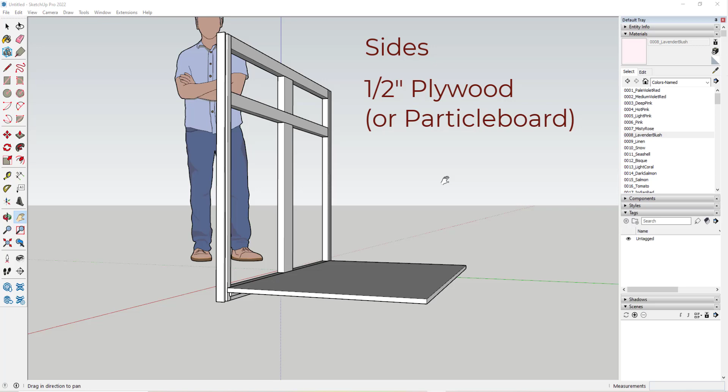We already know the sides are going to be cut from half inch thick plywood. That's a good standard thickness for plywood or particle board. It keeps the structure sturdy and doesn't make the cabinet too heavy. We also need to determine how tall the sides will be, as well as the depth of the sides.

Let's go back to AutoCAD to help us figure this out. Here we have the first front elevation, and now we're doing a cross section of the cabinet, with the face, the bottom, the back, and the supports, which in the last video I told you was a 1-inch by 4-inch. Turns out it's a 1-inch by 5-inch, so please make sure you update your information. It should be a 1 by 5-inch support right here.

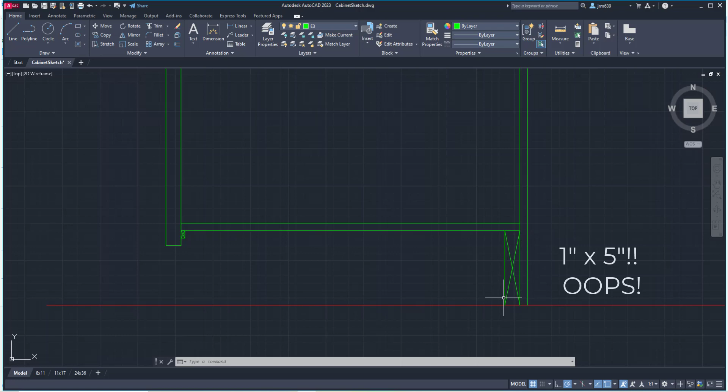What we need to understand about the side of a cabinet is that the toe kick is going to be installed. In our shop, we install the side first and then the toe kick. But in order to plan it out, you have to put the toe kick in first and then determine what the side is. I know it's crazy and confusing, but work with me here, people.

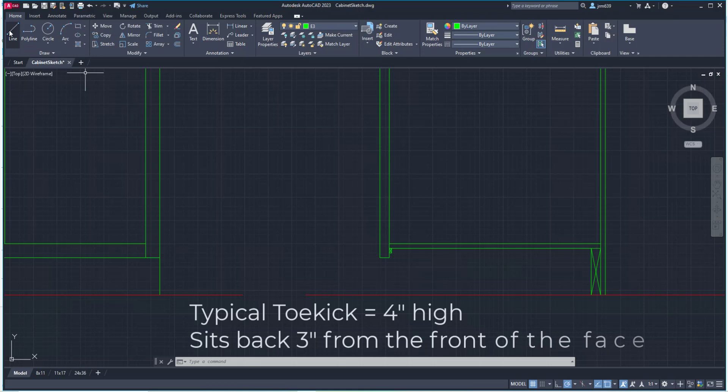A toe kick is typically 4 inches high, and it usually sits back from the front of the face 3 inches. So let's use a line and temporarily map this out. I'm going to draw a line straight down, notice that's 4 inches. Let's use the offset command, 3 inches, grab that line, and move it to the back. That's where the front of the toe kick is.

Lots of people use different sizes, and some would actually put in a 5-inch toe kick instead of a 4-inch, but at our shop we did not do that. We just used a simple 1 by 4, usually pine.

I'm going to do the thickness of this at 1 inch. And because this toe kick is going back in space, we're going to put an X just to indicate that's exactly what's happening.

Now, the reason I'm not putting an X in here - I was thinking about it - we usually want to use a hatch in plywood to indicate that it is indeed plywood. It's different from the supports that you see here.

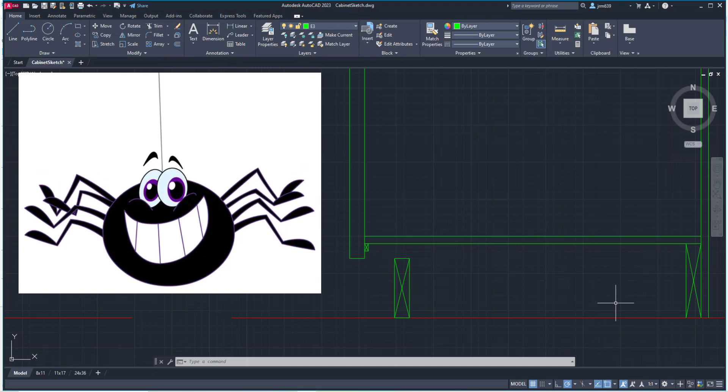Okay, so yes, it does create a little bit of a gap right here, and basically it's very empty underneath the cabinet. And sometimes you need to make a nice cute little house for spiders. I mean, I'm kind of anti-spider in terms of them getting into the cabinets and into our spaces, but they are free to live in walls and free to live under the cabinets. Just don't come into my cabinet. But they're very important parts of the natural ecosystem. They eat lots of bugs, so let's be spider friendly and create cute little spaces for them.

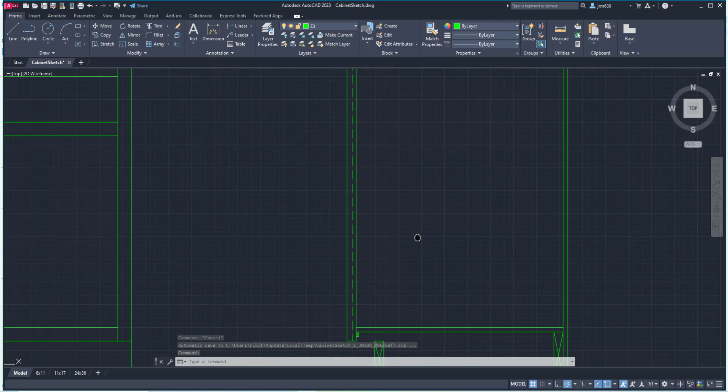But now that we know where the toe kick is supposed to go, remember that our dado went back 3/8 inch. So I'll hover and put 3/8 inch, and this is where the dado is actually cut. Let's make this a dashed line so we can tell this is inside - not on the outside of the cut, but in the wood itself. That helps remind us there's a dado mark there.

All right, so with the red line, la la la, that's not what I meant to do. Let's select it, not choose a color.

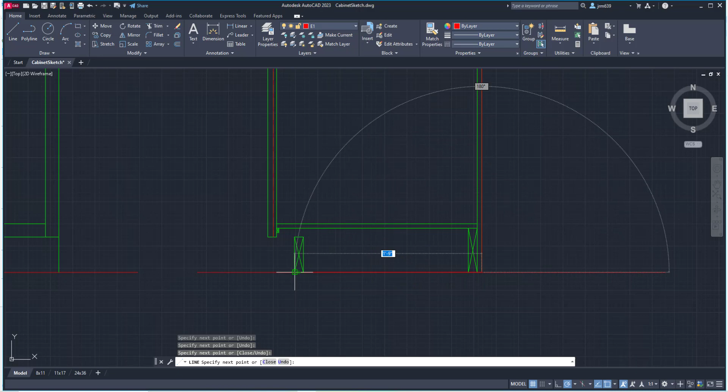So the side is going to live from here all the way up our dado, and it's going to be flush with the top of the cabinet. There's a couple trains of thought on whether or not it actually goes to the back or through the back. At our shop, we actually had our sides go all the way to the back side of the cabinet. So I'm just illustrating where the side is going to be living. It comes all the way down, and it does cover all the way to the finished floor.

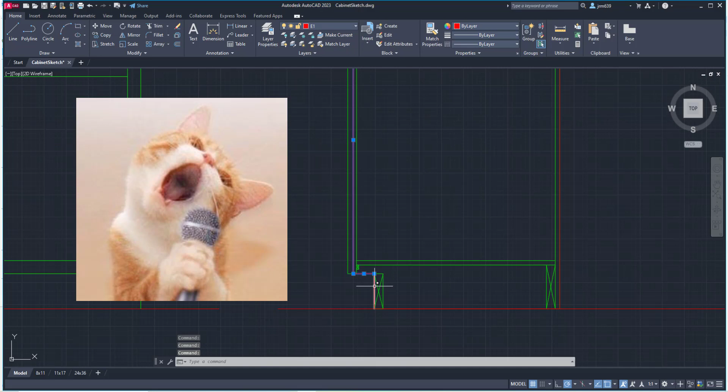It goes flush with the toe kick, and then it's flush with the bottom of the cabinet as well. So you can see now the red line indicates exactly what the side is going to be cut to. So let's grab all those red lines, even the one on the bottom, on the back, and let's move that over so we can get a better look at that side.

Okay, beautiful. So now we can start measuring. This is going to be, let's do distance, 1 foot and 11 3/8. Oh, that's always so much fun to work with in SketchUp, is 3/8. But that's what it is.

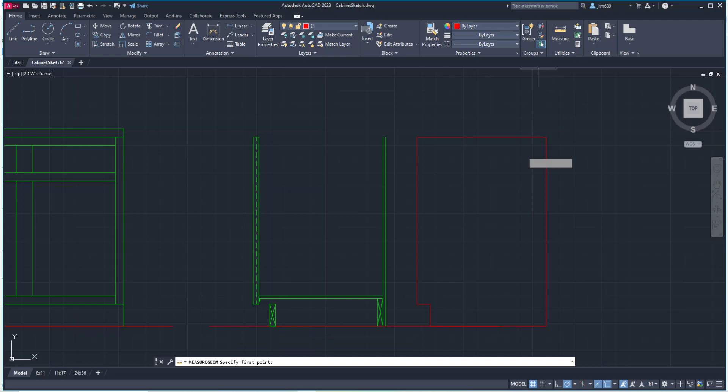And then how tall is it going to be? 2 foot 10.5. And again, remember that the countertop is up on top, so that's why we're not going a full 3 feet. The countertop goes to the full 3 feet, but not the cabinet.

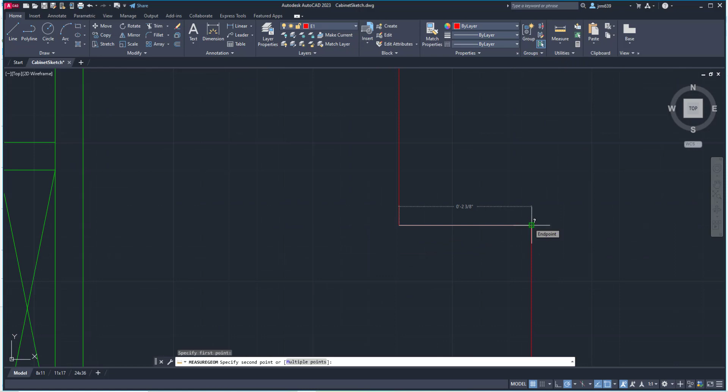And then it's important to understand that this little cutout is typically - did I do that right? Yes, I did. So I was just thinking that it should be 3 inches by 4 inches, but I forgot that we're not going the full side of the cabinet here. Our sides are actually sitting inside of the frame. So that measurement is 2 3/8, and then it's 4 inches tall.

So those are the basic measurements. Don't worry about it too much. I'm going to go over them in SketchUp. So let's go ahead and go over to SketchUp and start making our sides.

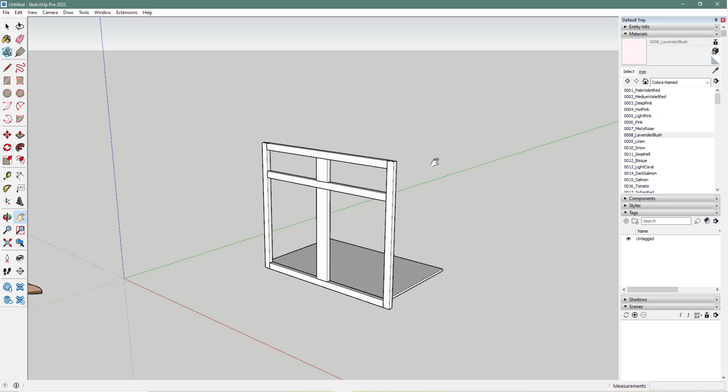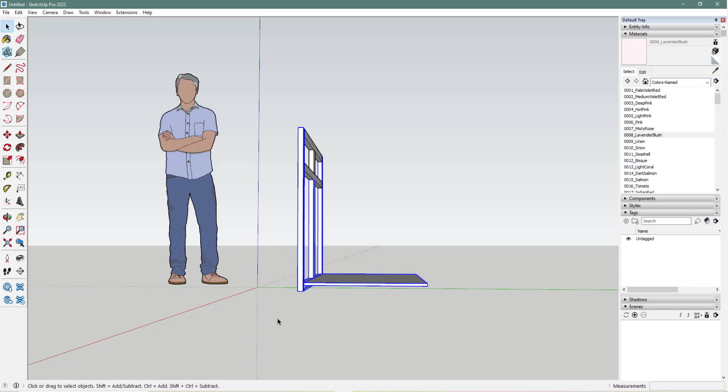Okay, we're back in SketchUp, and let's rearrange this a little bit. We're going to make the side right here. Remember that we're making it kind of the same way we did the stiles - do the thickness of it and then push and pull it all the way up the height that it needs. If you haven't already, we want to take the whole frame and the bottom and raise it up 4 inches from the basic floor line.

So if we haven't done that already, go ahead and select all of this and move it up 4 inches. If you've already done it, don't worry about it. Okay, so I'm going to take the rectangle tool and just kind of randomly draw out here. We need to make a long box aligned with the green axis this time. Notice the dimensions in the bottom right hand corner.

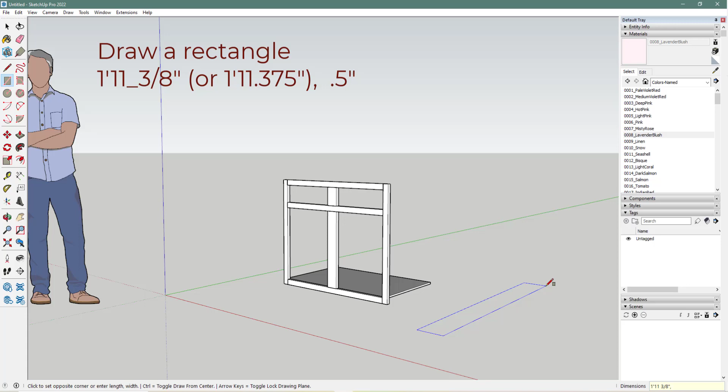This is going to be 1 foot 11 3/8. So 1 apostrophe 11 - well, let me get it to actually start typing here. There we go. 1 apostrophe 11 space 3/8 inches, comma, space. And then remember, we're doing the thickness of the material, so this is going to be 0.5 inches. It's going to look really skinny.

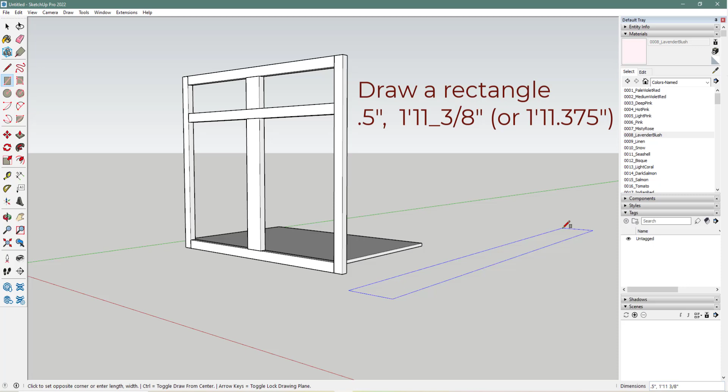Okay, I totally did that backwards. So let's do an undo and redraw this again. This time we have to do it backwards. So first is 0.5 inches - you have to pay attention to which direction you're drawing - comma, space, 1 apostrophe 11 space 3/8 inches. So again, it's a 1/2 inch by 1 foot 11 3/8 inch. Hit enter. And there we go. Now we got it going in the correct direction.

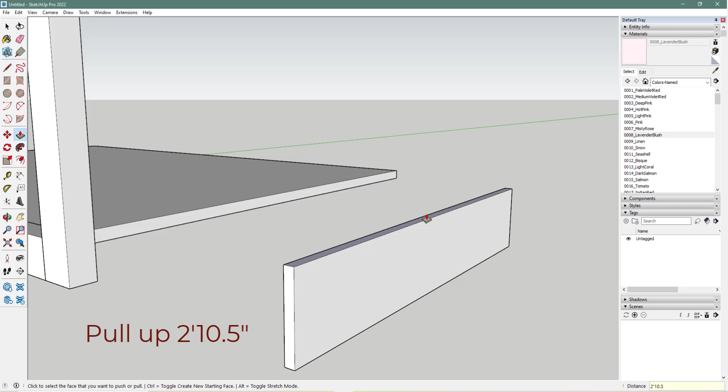So now we're going to push-pull this up to give it its height. You might have to get a little close in order to activate that face of that plane. And then it's going to be 2 foot 10.5 inches. And there is the height of our side.

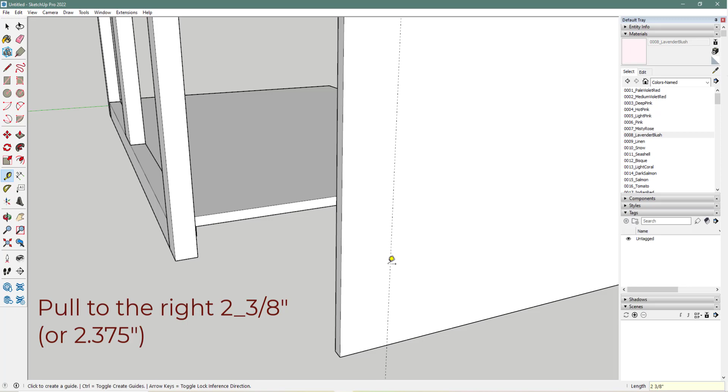We have to do the little cutout down here for the good old toe kick area. So I'm going to take my handy trusty tape measure tool. I'm going to find the edge - make sure that you get the correct edge so it's that corner coming towards you. Grab that and pull that back using the green axes.

And then we're going to do 2 space 3/8 inches for 2 3/8. So that's where that is. And then we're also going to bring this up 4 inches.

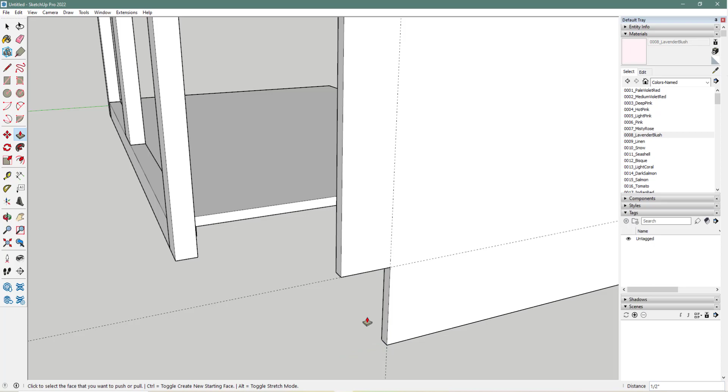Now we're going to use our pencil tool to actually score the surface. Without doing this, we can't cut anything. Then we're going to use the push-pull tool to push that back into itself until it cuts itself out.

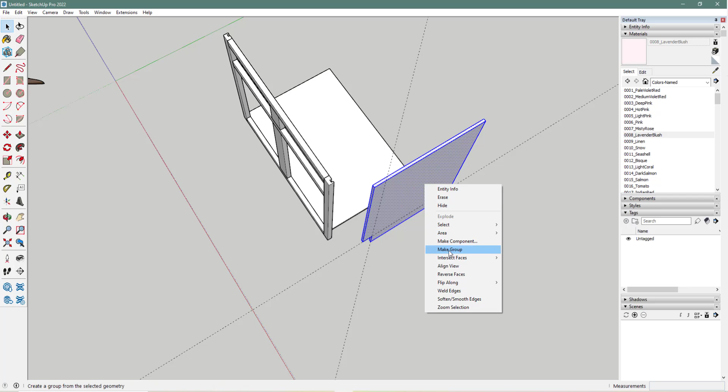So that is what the side of your cabinet is going to look like. Isn't that just marvelous? We do need to have a side over here as well.

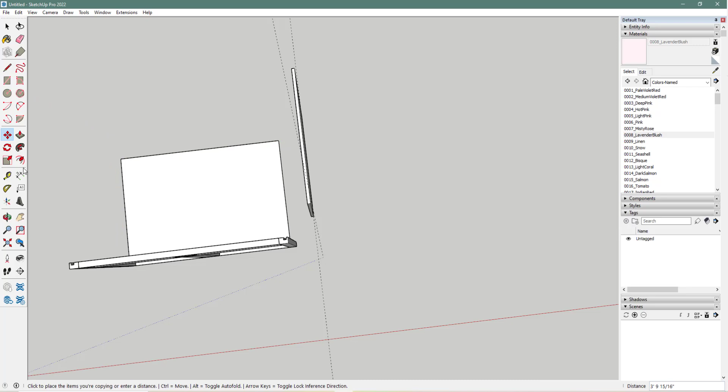So let's go ahead and triple click on this particular group, and let's group it. Now let's use the move command. Hover your mouse, hit control, then click on the side, let go of control so that you make a copy.

Let's see if we can get this to behave itself. I'm going to use the right arrow to make sure that it goes perfectly on the other side instead of up or down or whichever direction it was trying to go. And so that way I have both sides of the cabinet.

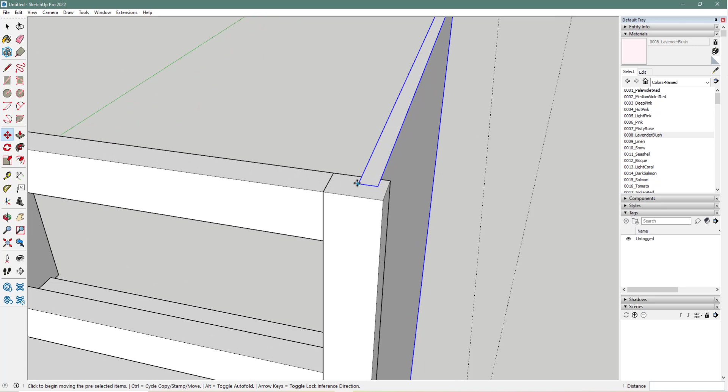All you have to do to get this into place is grab the side by the front right corner, use the move command to do so, and then place it right into that dado. See how perfectly that fits?

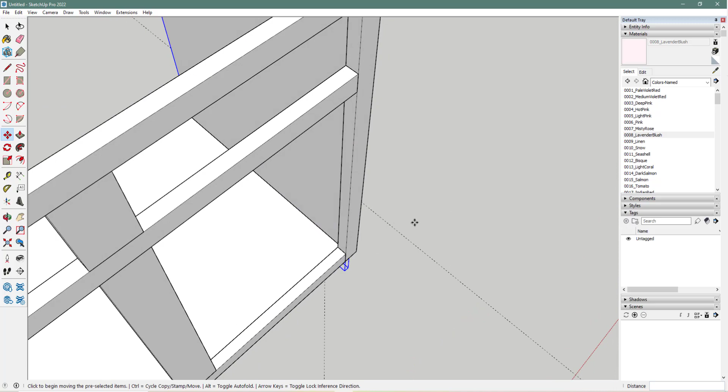Normally what you would do is put some glue in here, and then at our company, we actually used a staple gun to just staple into the corner. Nobody ever sees that part. That's like some extra support for the side to make sure it stays in place and that the glue has some support as well.

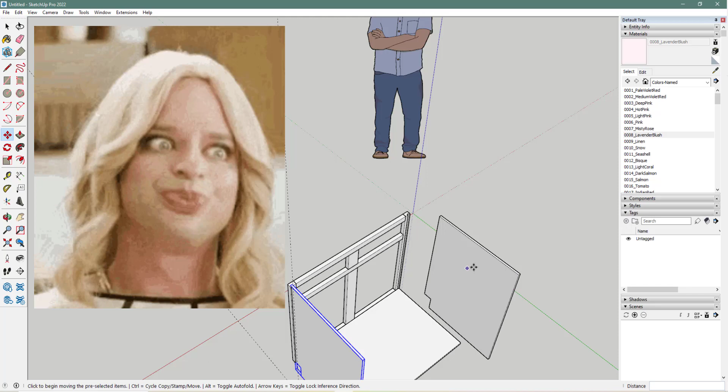So there we go, we got our first side in. Let's take a look at what's going on over here. Oh, look how beautiful that matched up right here. So math works—it's so important to make things flush.

And that's why you have to do the proper planning. Otherwise your cabinets look a little shady. We don't do shady cabinets. We always want high quality cabinets here.

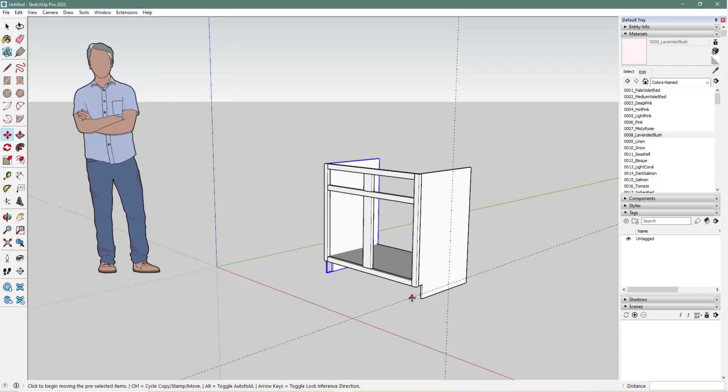All right, let's place the other one in place as well. So grab that, move command. You can go from any corner as long as you match the same corner on your dado. So there we go, our sides are in place.

The last step is going to be to go ahead and add that toe kick in. We're going to work from the bottom a little bit here, and remember that was a 1x4 inch, so it's kind of easy to work off one side.

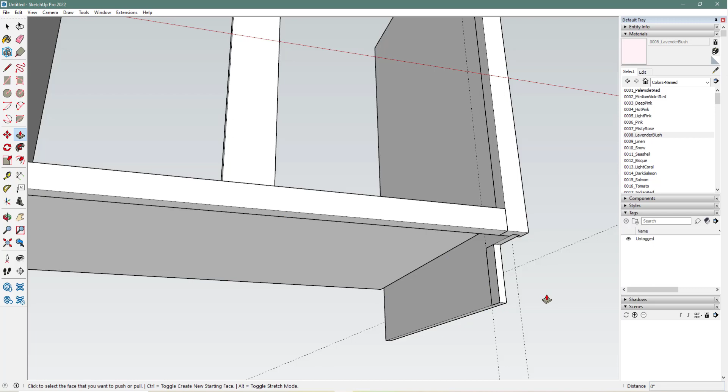Use the rectangle tool—actually, I'm going to use the measuring tape tool to drag this back and make sure you're on that green axis once again, 1 inch. And that helps me place a rectangle right here that matches the side like you see here.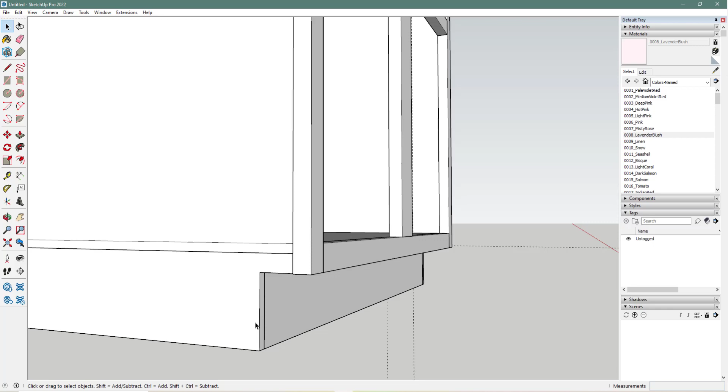And then we can use the push-pull tool to come across. Once again, when you're assembling something like this, you would already have this pre-cut for you. And we'd also glue not only the toe kick itself, but the side as well.

And then we actually use a finish nail gun to staple nails into it this way. And then you use putty to cover that up, and nobody ever sees that you actually used little nails to adhere and join these two pieces together.

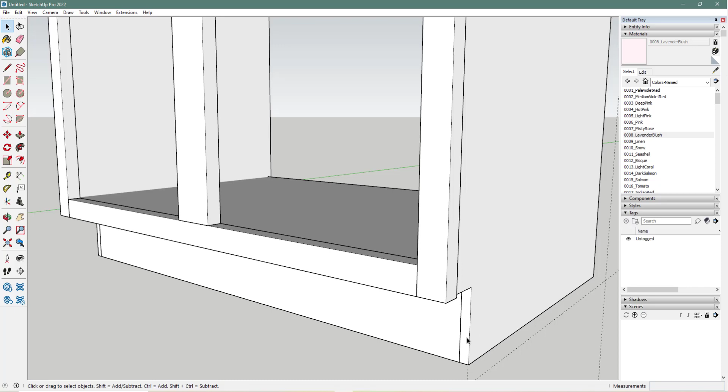Now some people can do a rabbet joinery or another dado joinery. I don't know, were we cheap? The better way to do it would be to do dado or dovetailing—that can really raise the price of your cabinets.

So if you're looking for cheaper cabinets, then the method of using finish nails and a finish gun into the side is actually perfectly acceptable.

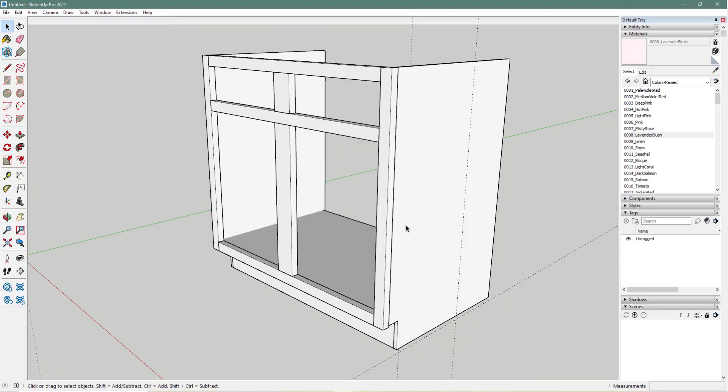So now you can kind of see how this works. So yes, the spiders can certainly still have access to their little space, but we're actually keeping our space free from spiders as a result.

So we're almost done. The next step really is going to be to put on the back.